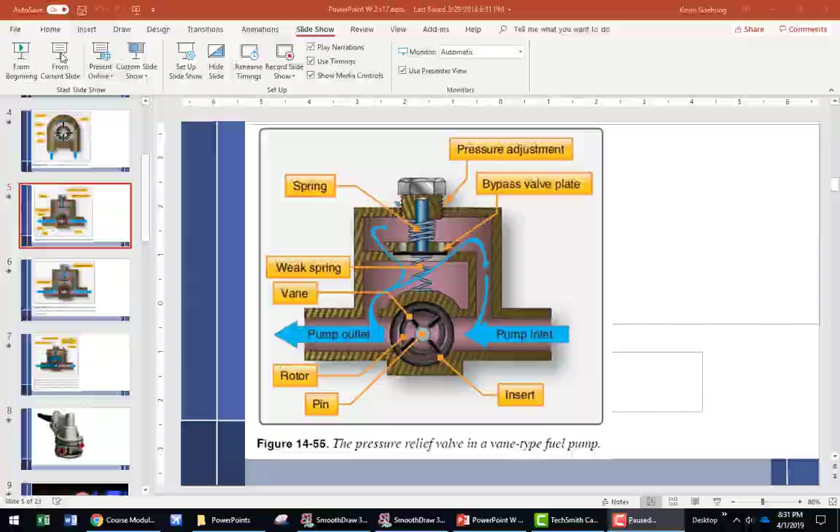All right. I promised you before break that I would explain this the rest of the way. So if you're just joining us at home.

All right. So the basic pump, oops, I lost my laser. The basic pump would just come through here and go around this way and then out. So if I'm at the drive end, which way is this pump? Clockwise or counterclockwise? Clockwise from the drive end. All right, so it's coming through here. But as we said, you have to have some mechanism to relieve pressure that could get built up so that we don't blow things up.

So what's happening here is, actually, I didn't know they had that. All right, so we're not going to talk about that spring. But what's going on here, you have a much heavier spring with an adjustment up here. And this part right here that's kind of shaped like a valve comes down and seats right here. And so normally it's seated down here. And fuel comes through here and comes through here. And it can come up in here, but it doesn't do anything.

And when the pressure builds up enough to overcome this spring pressure, it pushes this up and allows fuel to start leaking through here and back around to the inlet side of the pump. Very directly inlet side of the pump in this case. So it's coming through here, pressure builds up, comes through here, and goes down. And in this way, you can somewhat regulate the pressure output of the pump. So if I blocked this off right here, all the pump would do is come through here, push this up off its seat and come back around.

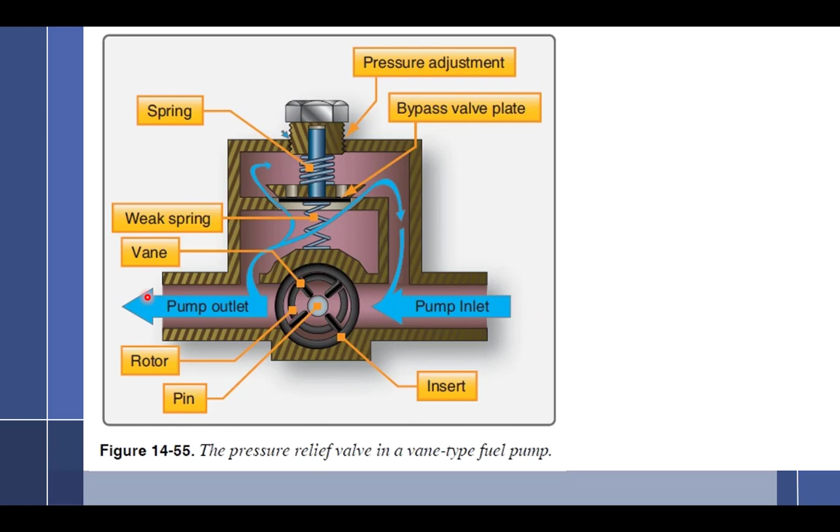Okay. Back here, as soon as the pump outlet pressure exceeds the boost pump, this pressure is higher than this pressure, the plate goes up, and then that stops it, and then the fuel goes that way. So will you be kind of limping back on that because your boost pump's only going to be at, say, 5 psi compared to? Well, I'm just throwing out PSI.

No. So in reality, with the exception of the Continental fuel system, fuel injection, the boost pump is more than enough to handle the load. You wouldn't even notice it. The Continental, you're going to lose about 75% power. And you guys will figure out why when we get there, because it's a very unique pump. 75%. You will be at 75% power. You'll lose about 25%.

How is the bypass plate held on to the spring? Like, does it ever get loose? Yeah, I know. There's so many different types of pumps, so many different ways. It can be a diaphragm. It can be built onto it. Remember, this is just a representation. This isn't the actual pump. One like that ever come with? I'm sure it's possible.

So, is that plate, the inlet bypass valve plate? This plate? Yeah. So you said there's holes above there. So what stops the fuel pressure from going the opposite way, back this way? The weak spring. So this weak spring tries to push the plate back up here. The only thing pushing it down is the pressure from here right now. So the weak spring just basically covers the holes that are there. It just helps this to stay in place.

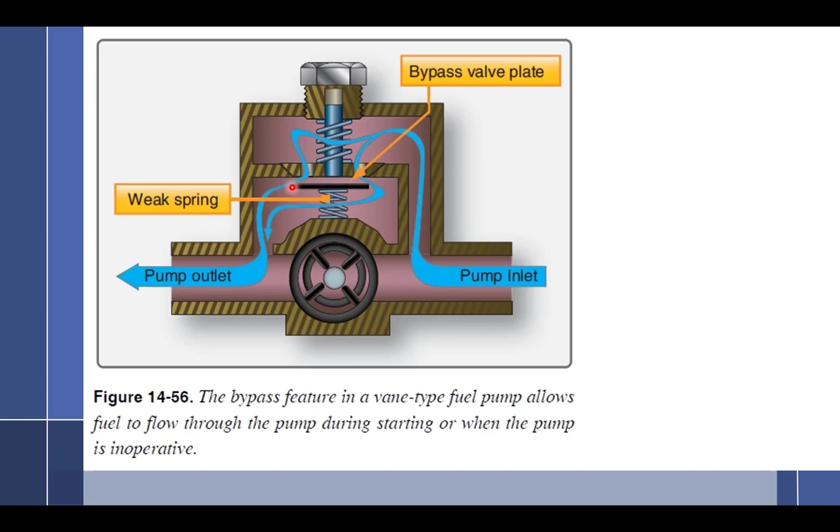Okay. Now remember that the one thing this is not showing is diaphragms. All right, so sometimes there's diaphragms in here. It's designed different. They're not exactly like this. It's just a representation to help you understand how it works. All right, we add a layer of complexity.

This is a compensated fuel pump. What happens as we go up in altitude? What happens to the fuel system? It's richer. Glad one person knows. It's going to enrich it. Do I want it to get richer as I go up in altitude? No. So I'm going to be leaning it out. If I lean it out, I need mixture control.

I need less fuel. Well, a compensated fuel pump is somebody's idea that says, hey, you know what? I understand that you're going to need less fuel, so why don't I help you out and drop the pressure a little bit as you go up? Wouldn't that be nice? So what happens with this one is there's a little vent chamber. Now, this can do two things right here. So my scenario, it's just open and we're going up in altitude. And in this scenario, there's less pressure on this chamber, which is assisting the spring. So it's a spring assist.

So I come down and I'm at low altitude. I have pressure on here helping the spring to keep this closed, which means I'll have more or less pressure? More pressure. Now I go way up in altitude and there's less atmospheric pressure. So is it helping the spring or less help? Less help. Now it's just the spring. So you see I can add or subtract from the spring a little bit. Well, let's take this and do something else with it.

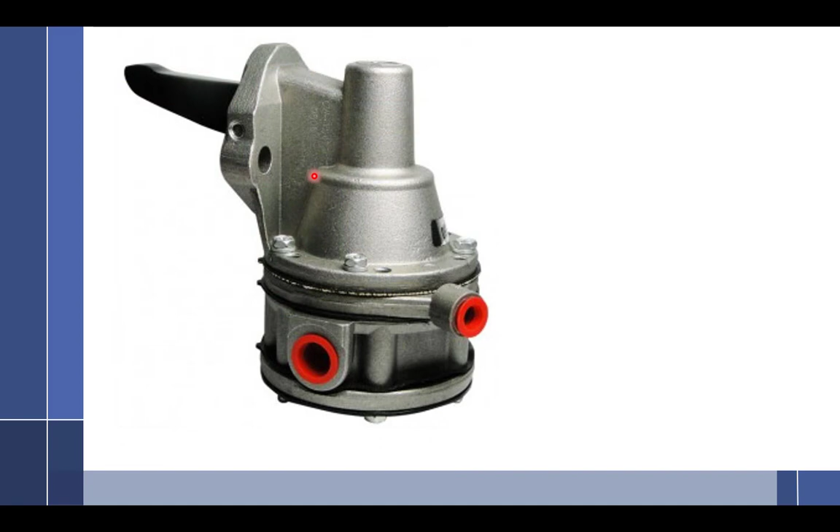All right, so that's the rotary vane pump. Now we can write some things about it. Operation: utilizes an eccentric rotor driven inside the cylinder.

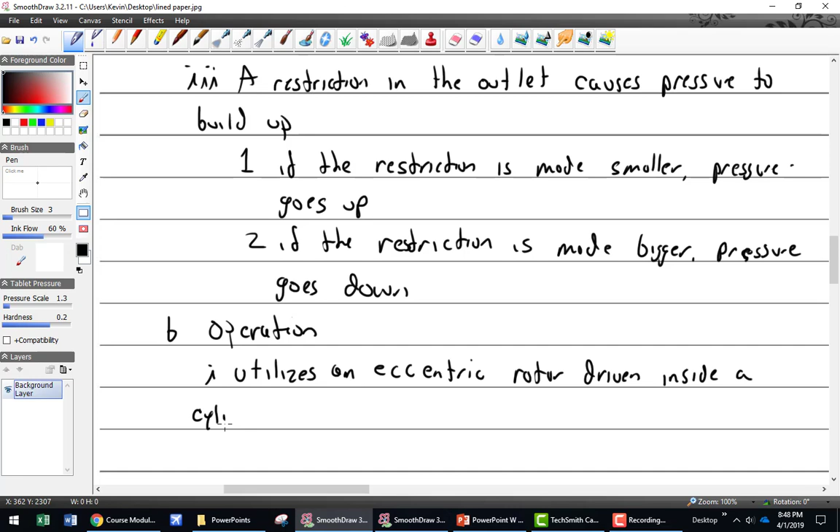Should be eccentric. Yeah, I spelled it the wrong way. E-X-C. Excentric, I think. Nah, it doesn't look right. I thought you had it right. Well, now I don't know. Somebody's got to look it up. That's in German. I know what you meant. E-C-C-E-N. The first one is spelled E-C-C-E-N-T-R-I-C. I had it right? Sorry, he was going with the German spelling. That's okay.

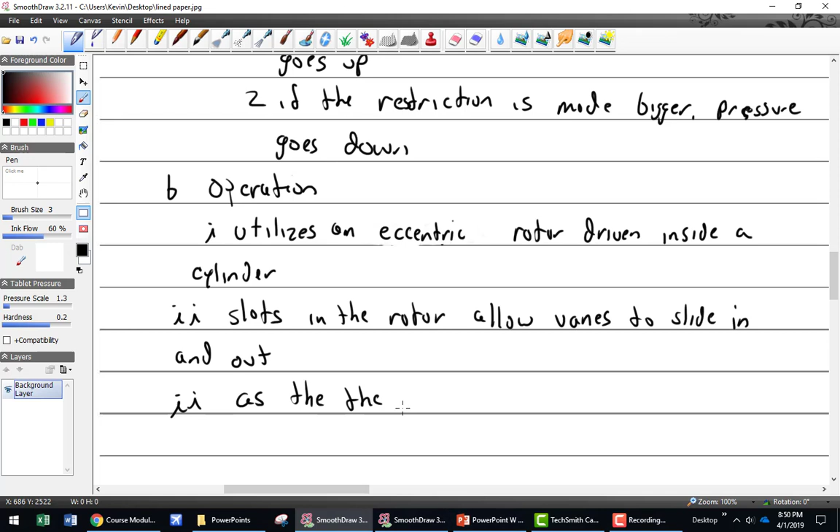All right. Slots in the rotor allow vanes to slide in and out. Sometimes those vanes are made of steel. Sometimes they're made out of carbon. If they're made out of carbon, you have to be very careful; they're brittle. Sometimes the drum they're in is carbon too, and then it's very brittle. As the vanes rotate, the volume in the cylinder increases and decreases.

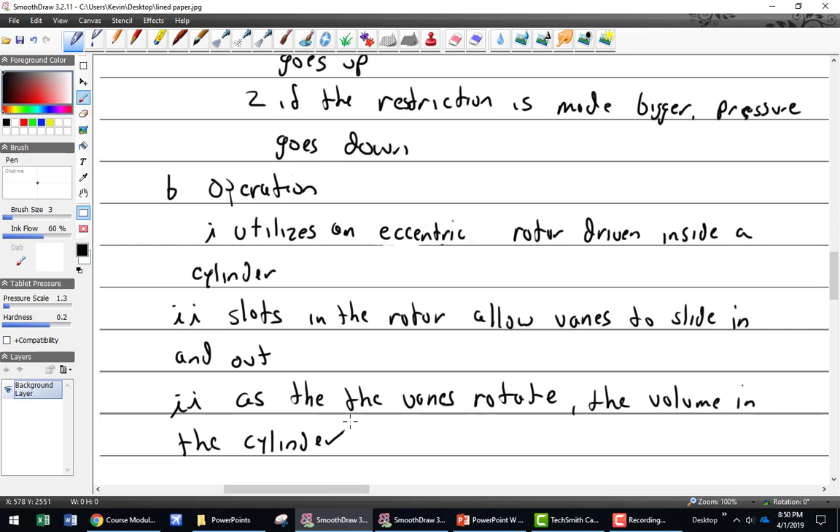So as it increases and decreases, remember I said as it's increasing, it creates kind of a low pressure, if you will, that draws fuel in, or it makes a space for the fuel. Then it locks it in that space, it rotates it around, dumps it out this way, and the space gets smaller, so it's got to dump out.

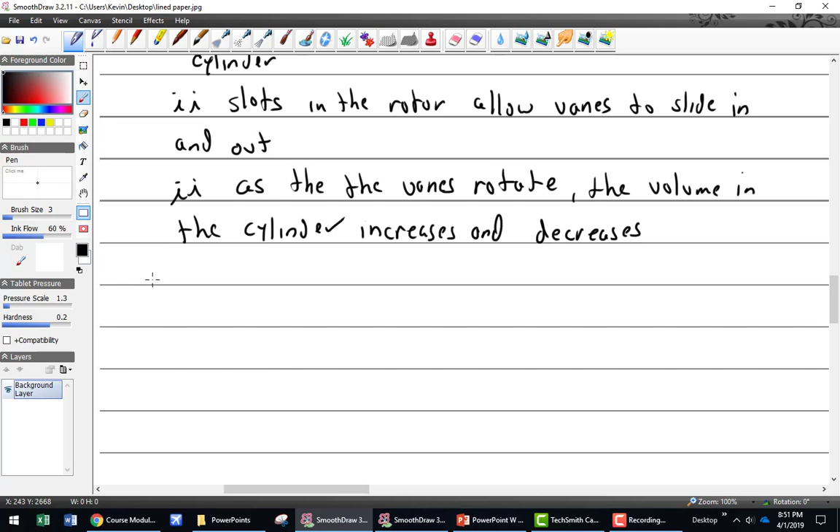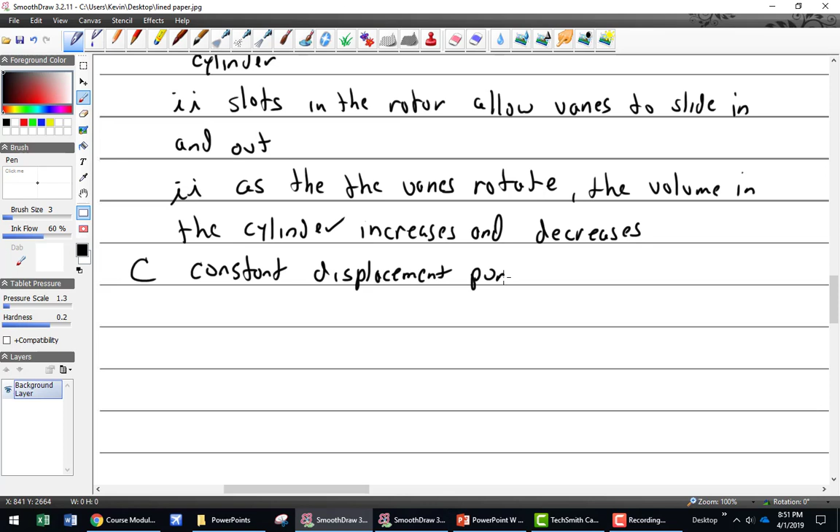Constant displacement pumps are designed to deliver more fuel than needed. You really don't want to design a pump that gives you the exact right amount.

Can you open the door?

What happens if I design it for just the exact right amount? If anything goes wrong, then you have too little fuel in yours. There you go. And what happens? A pump's going to wear. So as it starts to wear, it's like, well, hey, it only works when it's new. Nah, that doesn't work so well. So let's see, 200 hours before it goes bad. Constant displacement pumps are designed to deliver more fuel than needed.

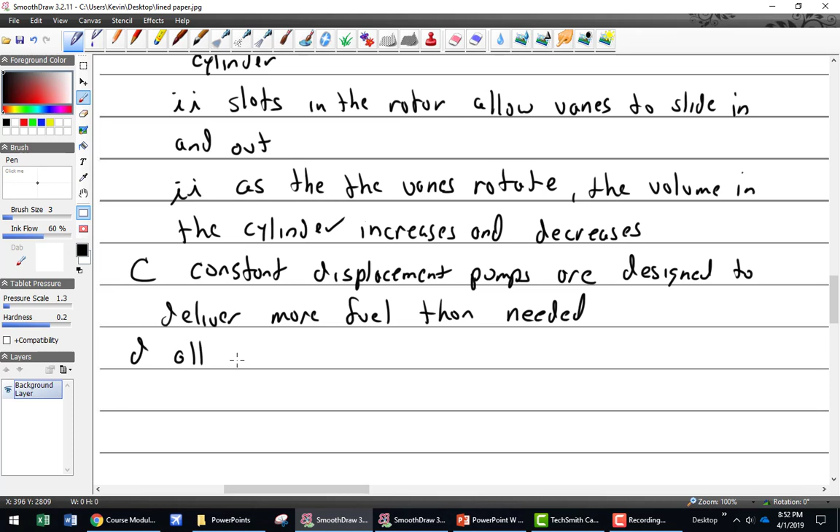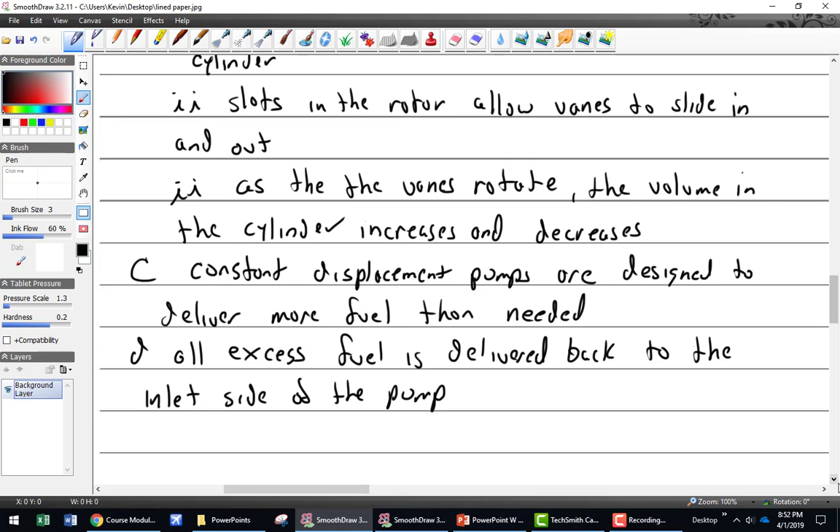All excess fuel is delivered. Where is it delivered to? Inlet side. There you go. Back to the inlet side of the pump. And in this case, it really is right there at the inlet. And as we talked before, sometimes the inlet side of the pump is a long way away. It'll go all the way to the tank, which is still called the inlet side of the pump.

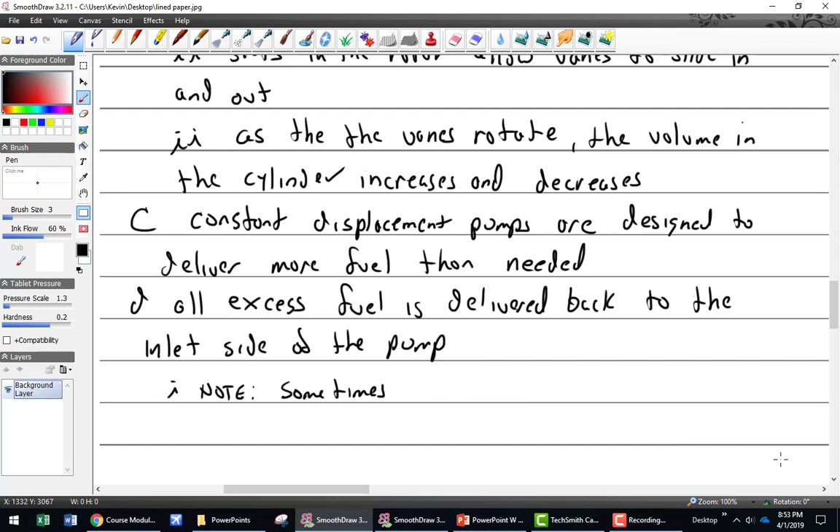I'm going to put that note. Sometimes, not always, sometimes the inlet side of the pump is the fuel tank. Doesn't always have to be the exact inlet.

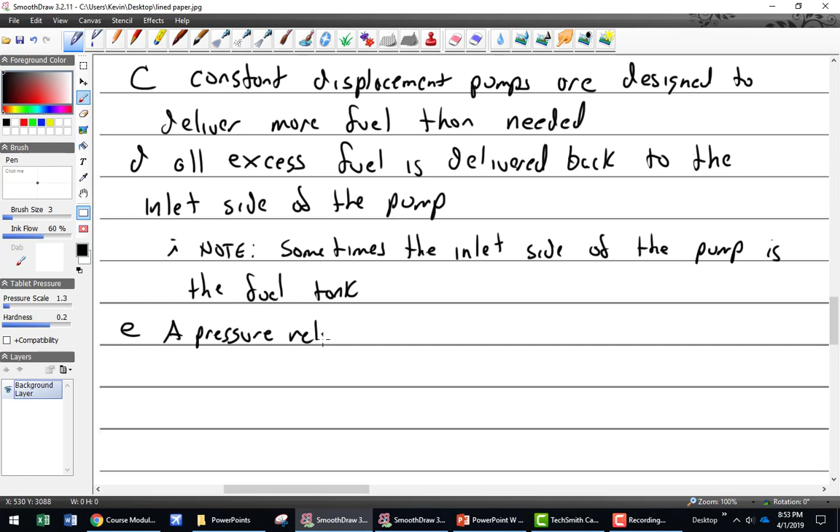All right, E, a pressure relief valve. Pressure relief valve adjusts the amount of fuel being returned, and thus, the pressure. So the pressure relief valve is just strictly opening and closing, dictating how much fuel gets returned, and through an orifice on the outlet, you can then set the pressure.

All engine-driven fuel pumps must have a mechanism to allow boost pump fuel to flow through the pump, which is the bypass mode, for starting and what else? If it's broken. And if it's broken, yep.

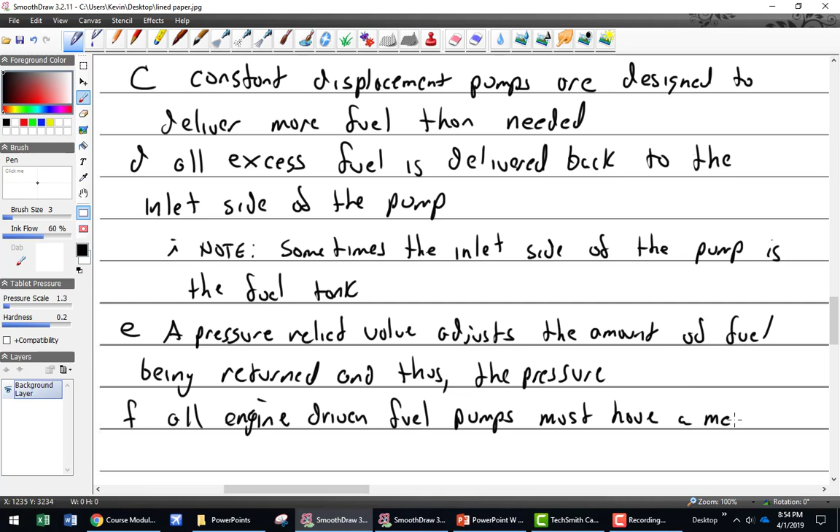All engine-driven fuel pumps must have a mechanism to allow boost pump fuel to flow through the pump. And we'll call that bypass. For starting, and if engine-driven pump fails.

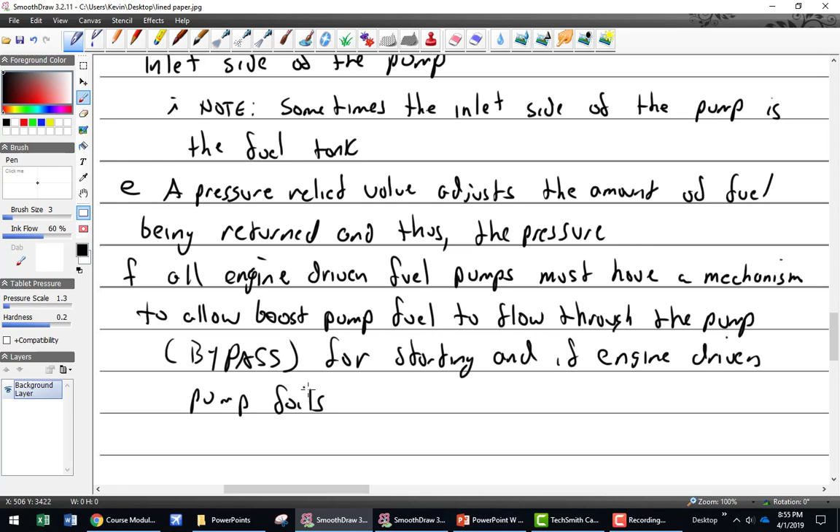On that first pump you showed us, that was a rotary, the very basic? I didn't see that bypass. No, because it was just a basic, and it wasn't a real pump that would actually be working. So it's like, here's the idea for a rotary pump. And actually, I can take that back. That is a perfect example of a vacuum pump that is on all engines. And there is no bypass because it's a vacuum pump. It's the only pump you have, and it's just designed to pump air. And so later in the system, you have to have a relief on it.

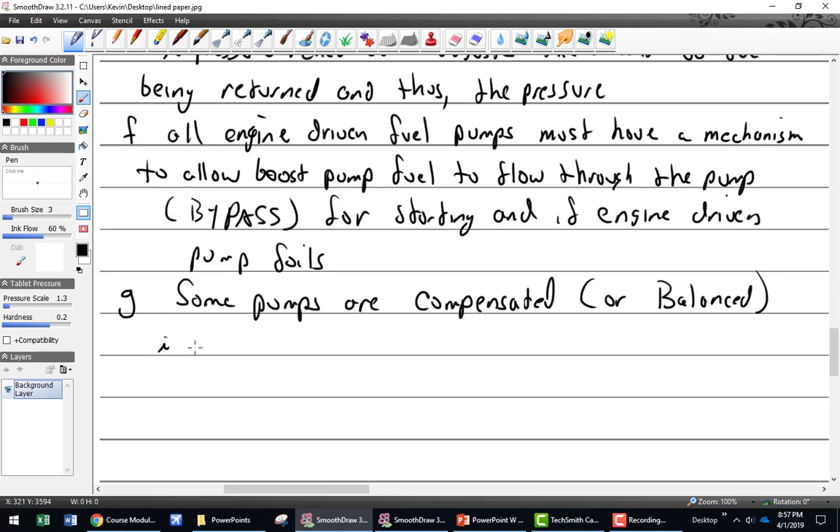Some pumps are compensated. Means they get paid for a living. Or balanced. I think there's a Q&A question that calls it a balanced pump. So atmospheric pressure, I could say, or upper deck pressure.

What is upper deck pressure? I've used that a couple times. I haven't defined it. Sounds like a Navy term. Yeah, Navy term. It's when you go up to the upper decks and they have boats and mates up there, and you know the pressure on you to get away from them. All right, so I'll define that.

But upper deck pressure is connected to a vent chamber on the pump.

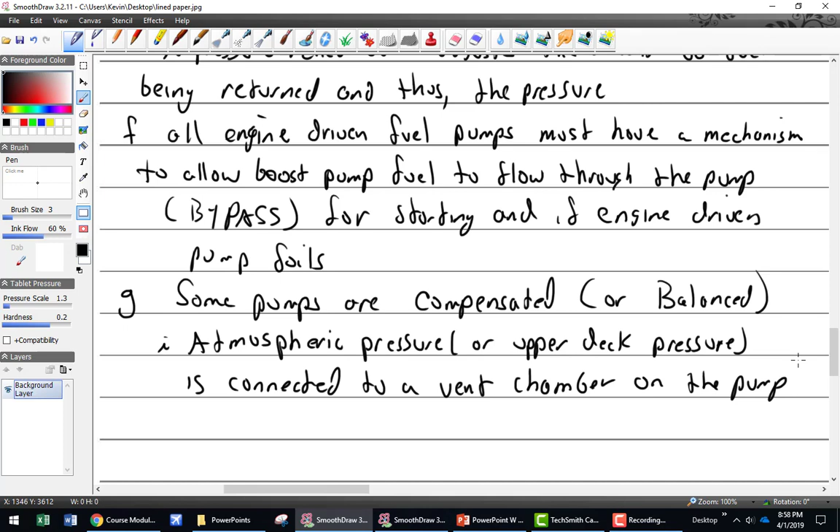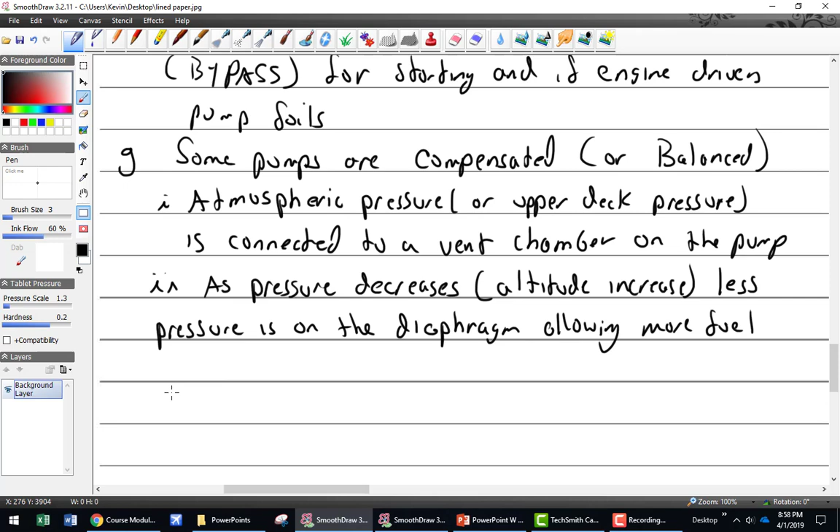As pressure decreases, that'd be atmospheric pressure or the pressure inside of this vent chamber. So as the pressure decreases, and when would the pressure decrease? Give me an example. When you climb in altitude. Okay, altitude increase, less pressure is on the diaphragm, allowing more fuel to bypass. So what's going to happen to my pressure? Up or down? All right, down.

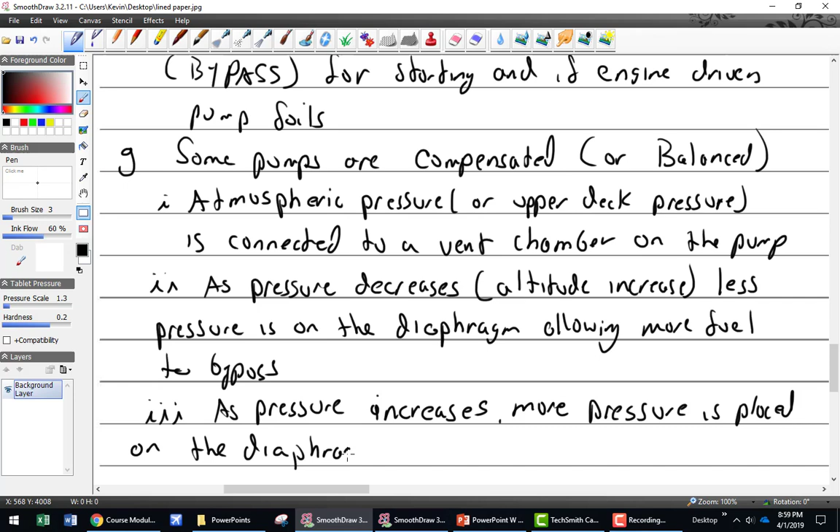As pressure increases, more pressure is placed on the diaphragm, aiding the pressure relief spring and increasing pump outlet pressure.

Yes? When you say more pressure is placed on the diaphragm, you mean pressure from the fuel on the other side? In the vent chamber.

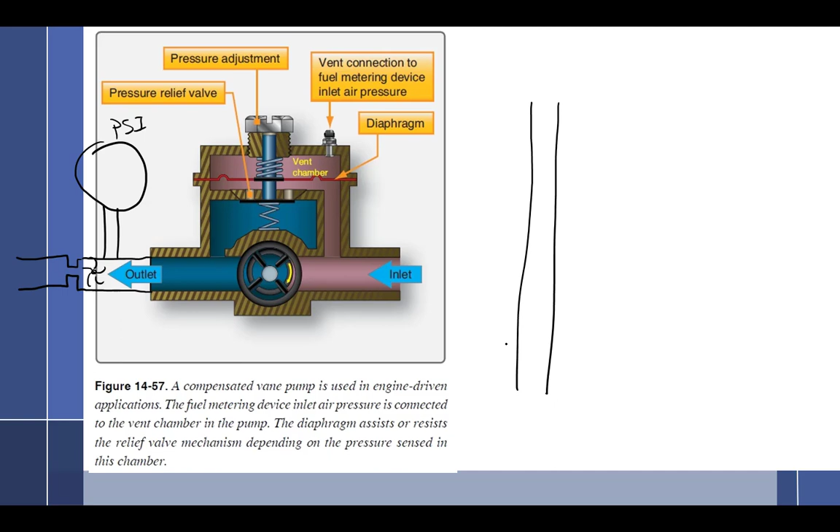And flow gauges can put little wheels on them. Little wheel rotates and tells how much is flowing. You can do that. Or you can have what we have in the lab. I have to draw parallel lines here, which never works out well. We actually have a column of fuel, and you actually get a little thing there that floats in the fuel. So there's a little space here and a little space there, and I could connect this right over here. It looks like a jellyfish.

So as the fuel flow increases, it makes this thing rise up, and you can actually read how much fuel flow you have based upon that. And it's read right here at this spot. And so we can check fuel flow. So you'll actually be doing fuel pressure and flow. What's the flow measured in, like gallons a minute? Yeah, pounds per hour, gallons per minute. It can do whatever. I'm going to put that over here. So here's my flow gauge right here then.

There's my flow meter. So let me ask you a couple of questions, and we'll get rid of this flow meter. So I have PSI and I have flow. PSI is on this side of the orifice, and flow is on that side of the orifice. So I'm running along, and we're happy, and we'll just say we have 10 PSI. And I put my syringe on here, and I pull back on it and create a suction right here. And let's say our flow, I'm just going to give it a number of 10. Also 10. 10 what? I have 10 gallons per hour, something like that.

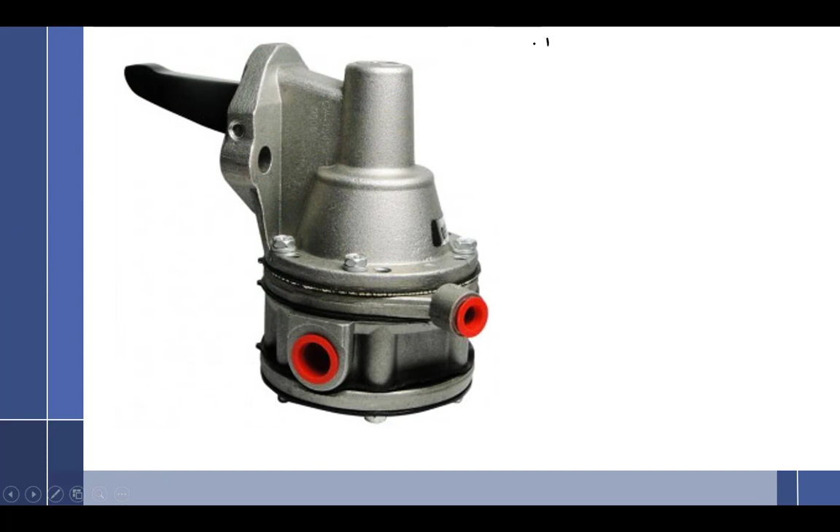So I pull a suction on here. What's going to happen to my PSI right here? I hope everybody's catching that. So where do you put the suction? Right here. Okay. Because you're going to open the relief. Whoa, why did it do that? Suction. All right, so if I put a suction, I'm going to just use a big syringe and pull back on it, create this suction on there.

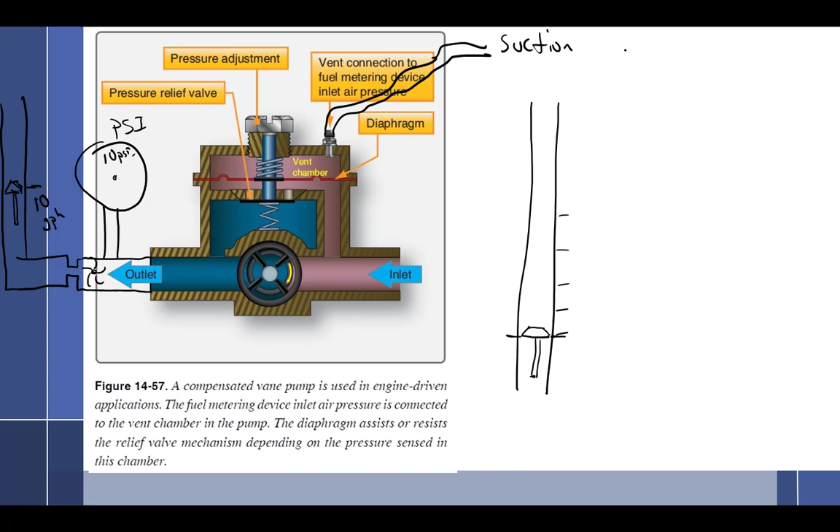What's going to happen to my PSI? Okay, PSI is going to go down. Why is it going to go down? So pressure adjustment is set for 10, and then the suction is going to relieve that 10 PSI pressure on the spring, which is going to allow pressure to circulate back. Less than 10 PSI. Well put. So that suction is going to act upon this diaphragm, which is going to lessen the effect of the spring, causing this to unseat itself sooner, and the PSI is going to go down.

What's going to happen to my flow? My flow is going to go down. Why did the flow go down? Because less pressure. There's less pressure, number one. Number two, I had fuel that was going out here through this restriction, but now it's easier for it to go this way. So if it's easier for it to bypass, how much fuel is going this way? Less. So if less fuel is going that way, then the gallons per hour has got to go down. Oh, I know what's happening. I've got to get rid of this pen thing. Flow is also going to go down.

All right, now what if instead of a suction, I put pressure? So I take the same syringe, but now it's out, and I put it on there and I shove it down on there. Put all this pressure in this vent chamber. What's going to happen? It's going to force the diaphragm down. So what is it doing to the spring? Helping it. It's going to be helping the spring. So PSI is going to do what?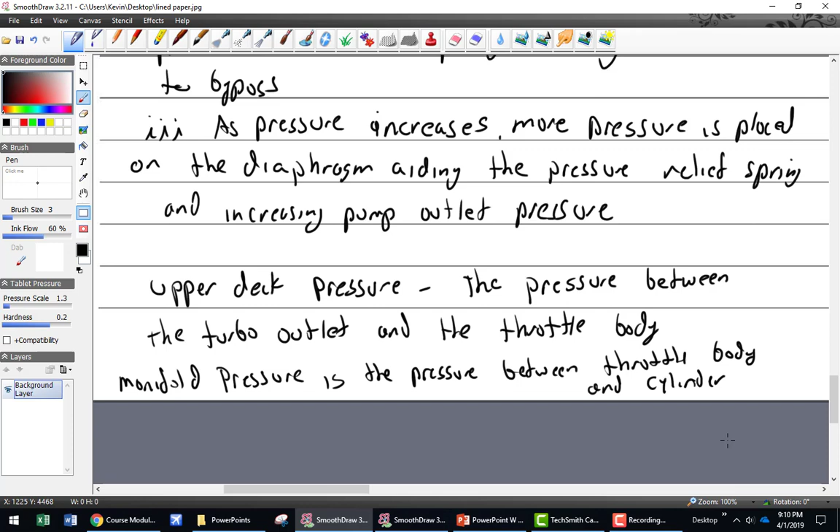So manifold, well, I don't say that is. I know we say manifold pressure is the pressure between the throttle body and the cylinder. Same thing. Manifold doesn't change. Manifold on a normally aspirated, meaning not turboed, is the same place, I should say. So, all right. Are we good with that? All right.

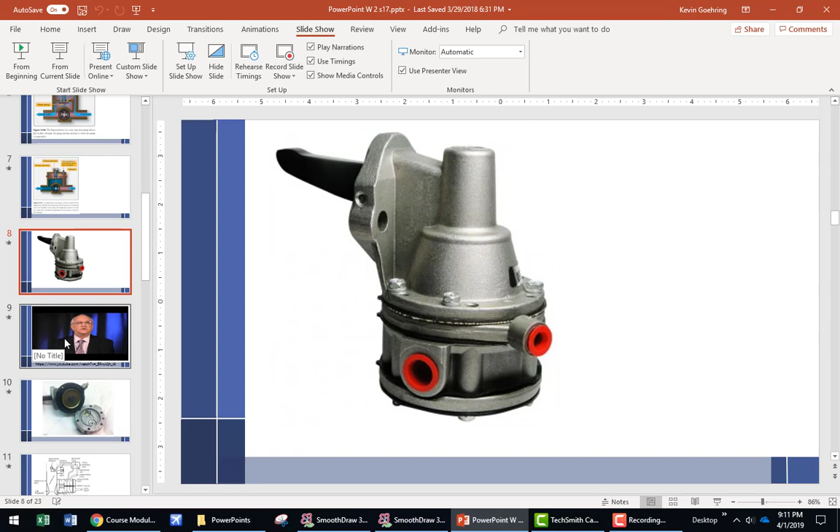The next kind of pump we're going to talk about is called a diaphragm fuel pump. And a diaphragm fuel pump is very common. It's probably the most common type of fuel pump in aviation, especially for Lycoming. This is mostly what Lycoming uses. Continental, not so much. I can't even think of Continental using this one off the top of my head. And what we're going to do is watch a video, but that is longer than 10 minutes. So rather than starting that now, we will stop this and